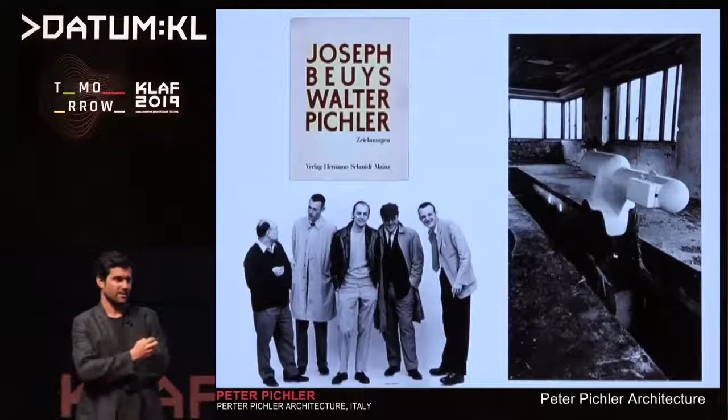He was a cousin of my dad, and Walter was really a true inspiration for me. He was one of the driving forces of the Vienna, Austria architecture scene, where offices like Coop Himmelblau, Wolf Prix, Haus Rucker were all active in the 60s and 70s. Walter was into this movement, and he was having exhibitions with Joseph Beuys and other internationally famous artists. When I met him, he was really encouraging me to study architecture and to see architecture not just as a technical profession, but as something else.

I was lucky to work a little bit on the furniture and to understand what architecture could also be. These are his sculptures that you see on the right, and he creates little houses for his art installations and sculptures. This was kind of an inspiration for me.

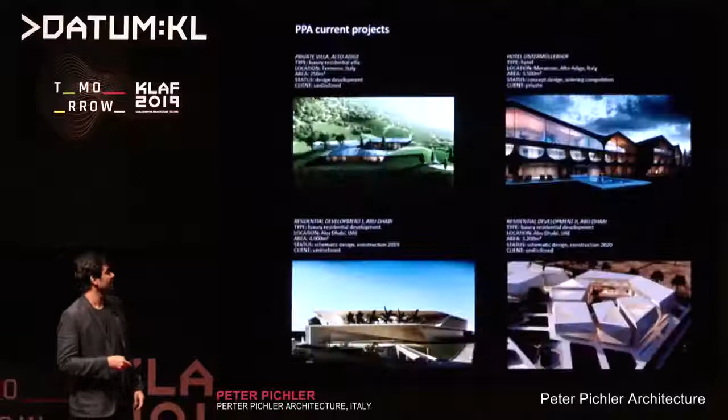Since then, we were lucky to win a couple of national and international competitions. This is basically the work we're doing in the office at the moment. We have some different projects in North Italy, some hotel projects, some work in Abu Dhabi, and we're working at the moment on some residential developments and villas.

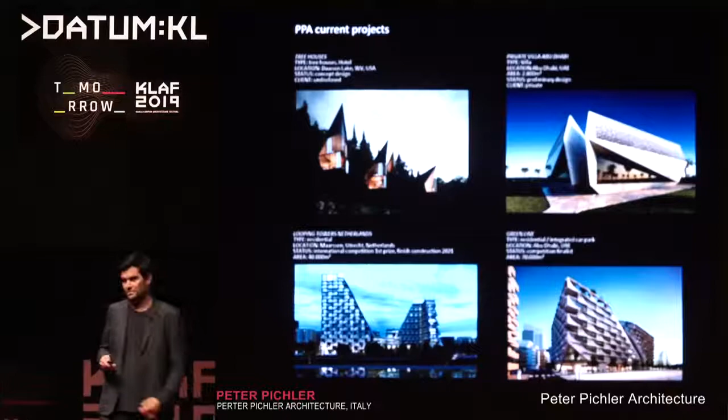We were also lucky to win some prizes in recent years. We were nominated, or were a finalist, for the Dezeen Emerging Architect of the Year. We were nominated as Young Italian Talent, as well as for the Medaglia d'Oro dell'Architettura Italiana.

So today I don't just want to talk about the physical object, but also the parameters influencing this architecture. This is a little bit the credo of our office: that for us, context goes beyond the immediate physical context - architecture is rather influenced by a lot of parameters.

These parameters can be geographical, cultural, political, societal, economical. Of course, sustainability is a big issue these days. Technology and vernacular.

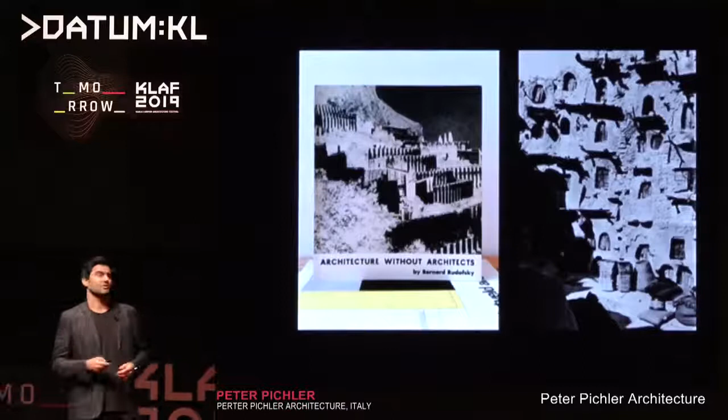One of my heroes, not just because I studied in Vienna, is Adolf Loos. I want to read a quote of his: changes in the traditional way of building are only permitted if they are an improvement. Otherwise, stay with what is traditional, for truth, even if it be hundreds of years old, has a stronger inner bond with us than the lie that walks by our side.

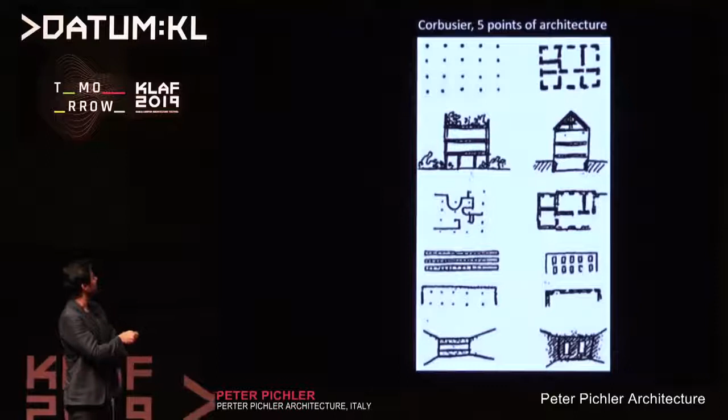When I was a student, I was a big fan of Le Corbusier. Here are his famous 5 points of architecture. What you see on the left side is what you need to do to be more modern or contemporary versus the right side.

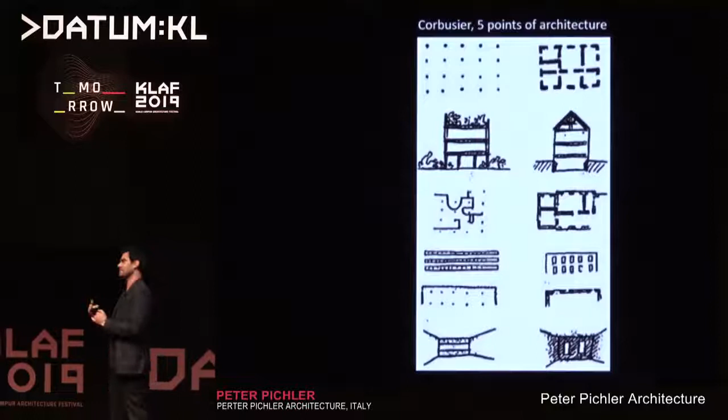If I look at this image, especially number 2 on the right, I'm not really sure if this is still needed or still contemporary. I also think that today we don't talk about that anymore. He was talking a lot about dividing residential, dividing office. I think today we talk about mixed-use development.

Marc-Antoine Laugier was probably the first really theoretical architect, even if he was not really an architect. He came up with the concept of the primitive hut, where he explored the anthropological relationship of man and nature, and that this relationship is the foundation of creating architecture.

So sometimes in our studio we ask ourselves: do we want to go with tradition, or do we want a revolution? I want to answer this question at the end.

I want to start with the first project we did three years ago, a winning competition in North Italy, the Oberholz Mountain Hut. This is my hometown—here is Milan, where our office in Italy is. The competition site was 20 minutes from my hometown, a ski and hiking resort, very beautiful, in Obereggen.

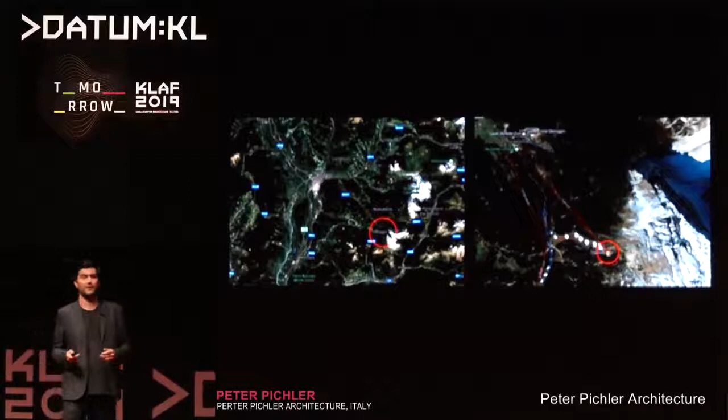The client was asking in the brief for a mountain hut with a restaurant. We're here at 2,000 meters. This is the famous mountain in the region, the Latemar—it's part of the UNESCO World Heritage, all the mountains, the Dolomites where I come from.

Down there was our site. You see the very beautiful mountains, landscape, the woods. When we visited the site, we immediately recognized this hut—a very typical building with a sloped roof, a wood construction, because the wood is right next to it, so it makes a lot of sense to use wood.

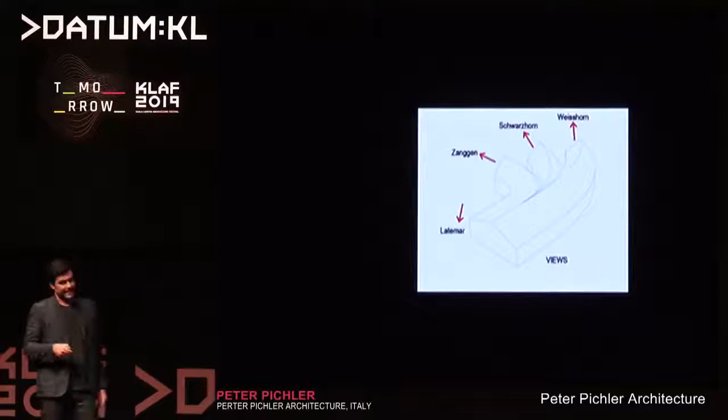I think most, actually all, of our winning competition concepts are very simple. In that case, the idea was to create a kind of fallen tree, looking towards the main three mountains of the area, as a contemporary interpretation of the typical mountain hut. So we came up with this idea.

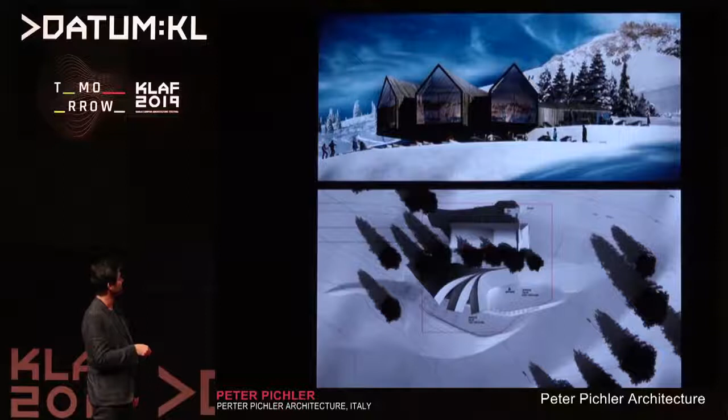This was the competition entry—you see these three sloped roofs facing the main mountains, and the wood construction. Here on top is the existing cable structure, and this is our new structure. You come down here to the ski slope, here you have a terrace, and from here you can also go hiking to the Latemar, the mountain we see on top. So this was our competition entry.

Here you see you arrive with the elevator, you can go down. This is already the construction.

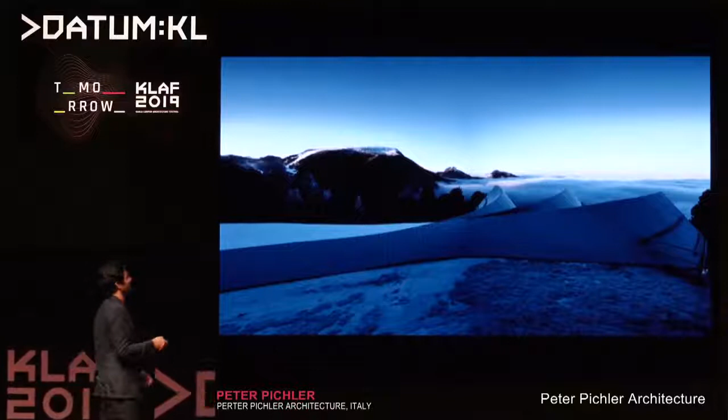So we had a lot of debate here. You see the main three mountains that I was mentioning before. But the client, there was not a single client, there were 8 people in this company. So there was a lot of debate because there is another mountain here in the background, the Mendel, that you don't see because it's foggy. So we were rotating the hut around probably 15 times till the client called us at 7 in the morning and said, that's the position and that's how we're going to build it.

So you see this almost fallen tree, this connection with nature of this building. And here you see it in the winter when people are skiing here. And again, you see this very typical sloped roof from the outside. It looks like a very typical structure from there.

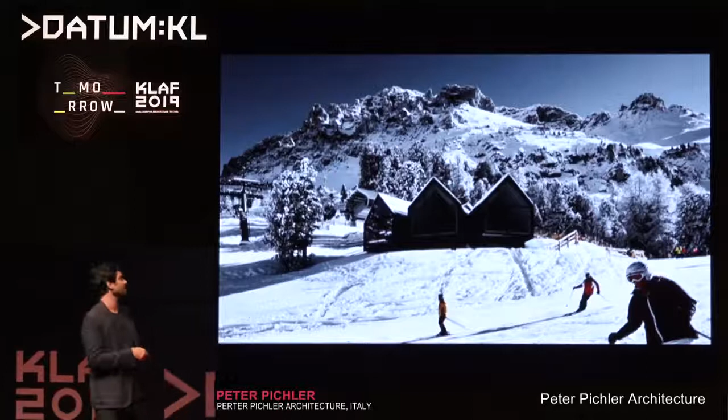But then when it comes to the inside, this is what we call the contemporary interpretation of it. So you see these spaces here. In the region where I come from, there is a space called Stube, which is a very typical space, always made of wood. It's a very small, cozy space. Sometimes you have a chimney inside. So what we tried to do with this project is give a kind of contemporary interpretation of this Stube, this very typical space.

So we created this kind of open space Stube with a structure that gradually fades from a roof into these walls, to create a certain privacy in these pockets that are looking outside and facing towards nature. So you see here the restaurant.

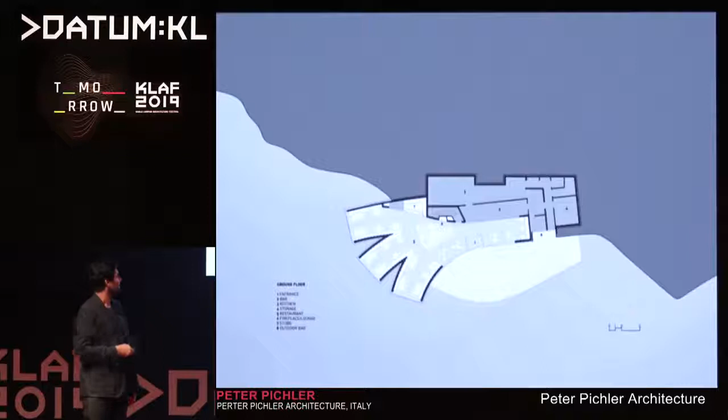The plan is very important, not just a graphical image for us, but it really explains the concept. In this case, you see the light gray here, which is the actual restaurant with the bar. So the public spaces versus behind we have the more private spaces, kitchen and storage. And at the same time, this concrete wall that you were seeing before on the right side, you see it here in plan, and it's dividing the public space from the private one, but at the same time it defines exactly the line where the building is above ground and underneath ground.

You see a section here. You see also the existing station. And at the beginning we had a discussion with the clients. We were winning the competition and he was asking us, did you already build on 2,000 meters? We said no. But do you have experience? We said no. Can you do that? I said, let's try it. And he trusted us and said, okay, let's do it.

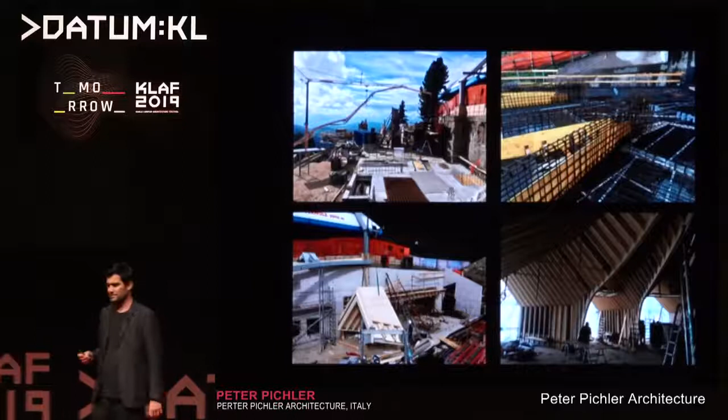Here you see construction images. Of course it's pretty challenging to build at 2,000 meters, because we were also thinking about using a helicopter at the beginning, but then there was not really a need for it. There was no walking path to that hut, so we created a small street up there that could be used during construction, and now we reduced it, and it's the walking path where people can hike up to the hut. So here you see these elements of wood that slowly, step by step, were brought together in the structure.

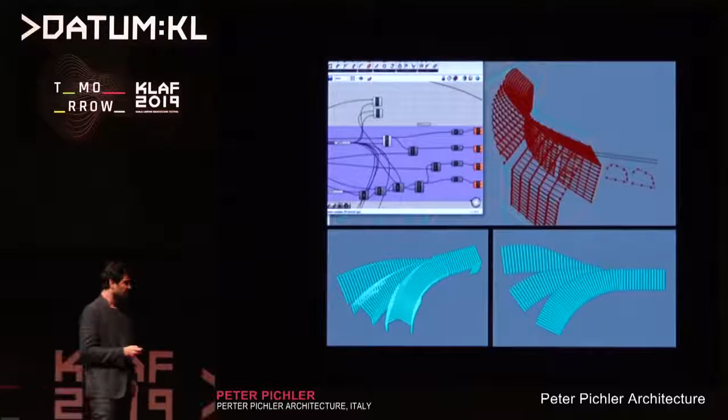You see a parametric model, how we developed this entire structure. We also believe that intelligent architecture needs to involve engineers since the beginning, not just after the competition, and not just structural engineers, but also sustainability is a very important issue. So we developed this kind of structure, and again, coming from the background of Zaha Hadid, where I saw a lot of things like form finding, I was not so interested in that. We really use parametric tools in order to optimize structure, but less to generate form.

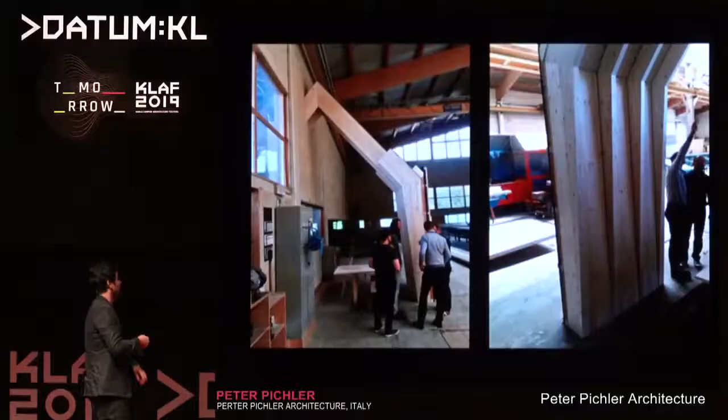So this is a prototype where you see this rib structure gradually fading into zero. This is a detail that we really like, because for us this is like optimizing the structure, and structure for us is something beautiful, something we don't want to hide. It's something we want to show also in this project. So you see here the only steel beam that is basically used in this project.

Insulation when they finish the project, and here is the final result. Also in this case, black wood, or blackened wood, has a certain tradition there. The natural huts in the area with rain and sun, after a while become gray because wood works that way. So we didn't want to have this natural pattern of the sun, because our building was exposed south and north. So we used a technique. At the beginning we wanted to burn the wood, which is also a very old tradition, but it was unfortunately too expensive, so we found another solution for it.

Here is the terrace, you see the entrance. There is this kind of glass that divides the inside and outside. Here you see the lounge space, and again this wall that divides the spaces. The furniture is another issue.

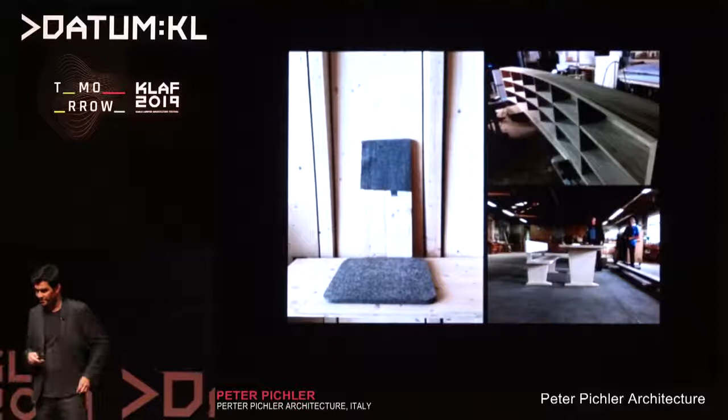We did a kind of slightly reinvention of the Tyrolean classical chair, which you see here. He was very happy to work with us on that project, and we modified and designed the furniture ourselves. Here you see some outdoor furniture, indoor furniture.

Also, this was a funny adventure, bringing the 500 kilo heavy concrete sink up to 2,000 meters. When we installed it there was a little problem, but the client didn't see it, so we were quite lucky.

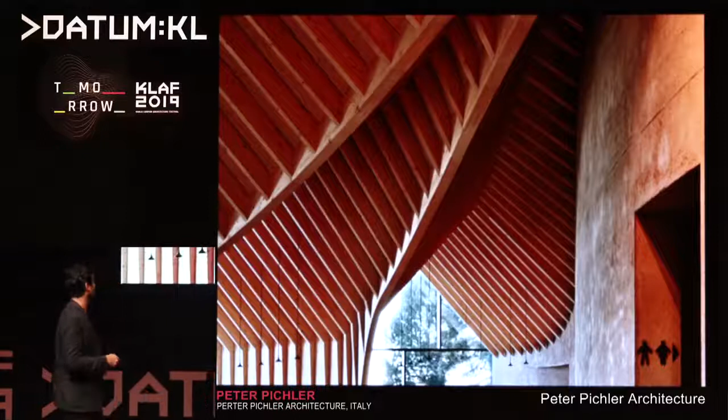The details of the connection of these ribs into the concrete wall, and the bar when you come in. This is the bar view. And again, nature in this case is the most important, or the project should connect to nature. I think this image speaks by itself.

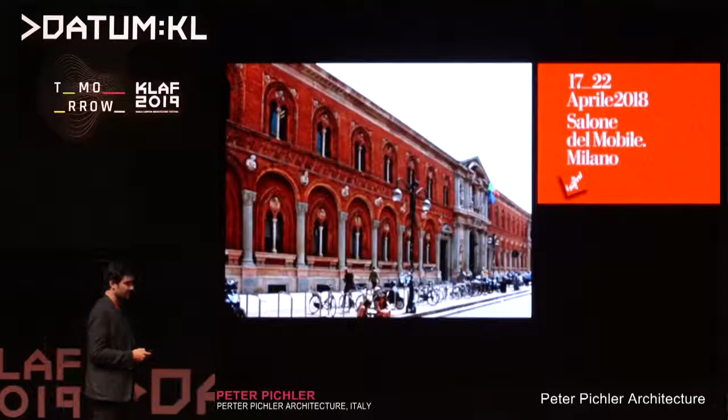Another project we have done in Milan for the Salone del Mobile last year. I think maybe a lot of people have been there already, but if you haven't, you should go. It's definitely fun, a lot of party, especially for the young ones here. It's a lot of fun for 2 weeks.

Here you see some images of the Fuori Salone. So you have always the main Salone, which is in the fair, and then you have the Fuori Salone, which are mostly installations and parties in the city within the center of Milan.

We were asked by Gilda Bojardi from Interni to create an installation in this beautiful courtyard of the Ca' Granda. This is in the center of Milan, in the Città Studi, so it's a university. It's basically the first Renaissance building in Milan, done by a famous architect, Filarete.

Our installation was basically playing with the main elements of the Renaissance, which are geometry, symmetry, and proportion. We tried to create a kind of wood structure made of 1,600 sticks, made of 3 wings, that could give a contemporary interpretation or answer to these main 3 features of the Renaissance.

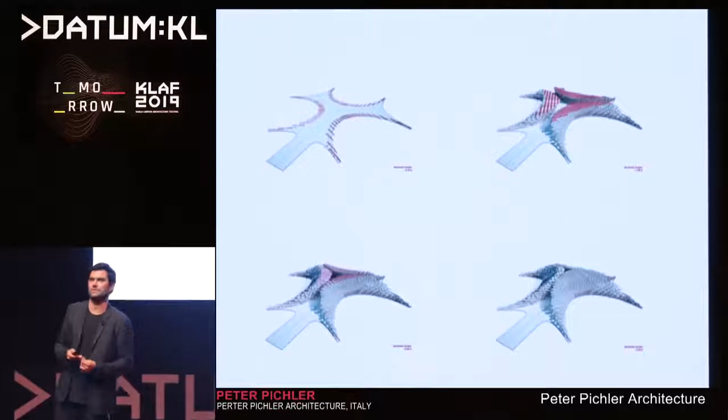So we came up with this idea, with these layers, to create these 3 wings where you can go in and just relax. We also created benches inside where you can sit down. It was actually a lot of work, but in the end it was done very quickly. I was wondering how they could bring up everything in just 2 days.

Here you see, when you enter the courtyard, the installation finished. For us, the symmetry was very important, so it was important that our structure really lies down at the entrance and opens up.

You see this kind of physical object from the outside, but for us the space inside was very important. Like in all our projects, I think the space inside and the perception of that space is very important. In this case, it's really about light and shadow.

Here you see the different layers of architecture. You have the kind of brutalism, a very iconic building in Milan that everybody who has been there knows, Torre Velasca, brutalism from the 50s. And you have the Renaissance, and then you have our small wood structure there.

You can go into this space, and this image really explains a little bit the concept of light and shadow in the structure. People walk a lot during the Salone del Mobile, so they're pretty exhausted. The idea was that you see these benches on the side, so you can go in and enjoy the space, relax a little, and experience this perception of light and shadow inside the structure.

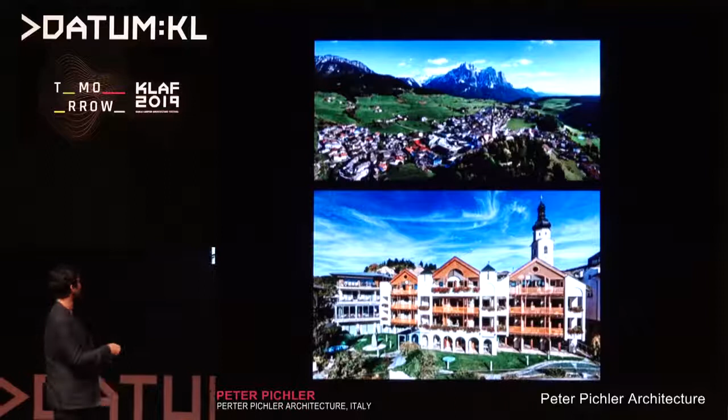The client asked us to participate in the competition, and I asked him why he wanted to invite us. He said he didn't really know, he'd just heard of us and thought we might be interested. He came with the idea of a flat roof, putting a pool and another sauna on top because he needed more space. We said no, we wouldn't do that, and he wouldn't receive anything from us if we took that approach, but if he wanted, we'd participate.

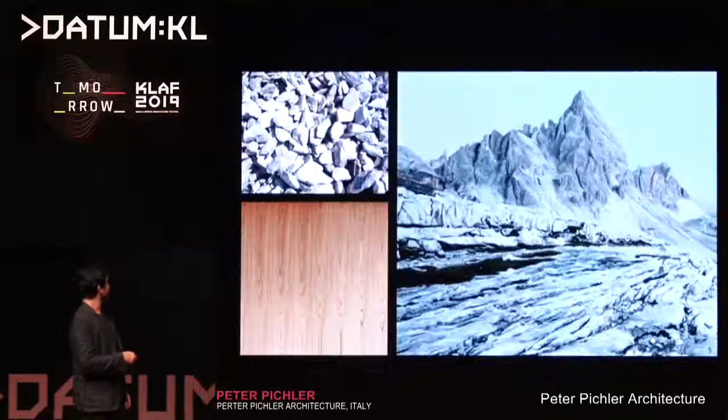We came up with a very simple concept: to bring nature and the mountains back to the hotel, working with local materials and local wood. Later we had the idea to collaborate with the client's son, who is an artist, and have him create beautiful art photography of the mountains for the hotel. This was our competition entry.

The idea was to open up the spaces, to remove all this kitsch. We left just a few slabs and a few columns, and the rest was totally restructured.

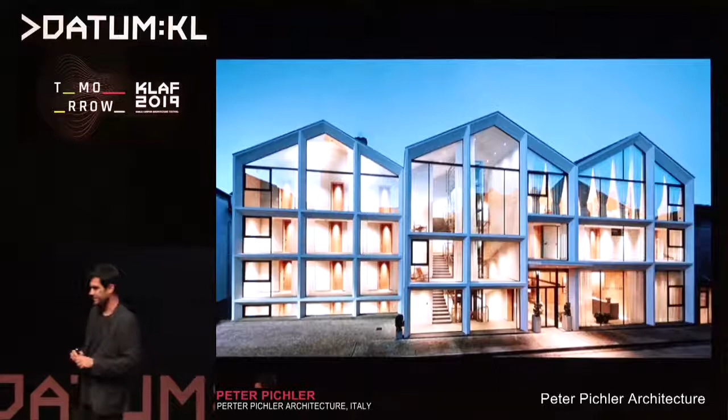As you can see here, this is the built project now. This is the entrance when you come from the street side. The building should open not just towards the mountains on the other side, but also towards the main street, and towards the church, which you'll see in the next image.

These are the rooms — you see in the background the center, the small church, and again this opening of the entire structure towards the mountains. From the inside, we tried to create a contemporary interpretation of alpine style that's really reduced in aesthetics, with open, connected spaces.

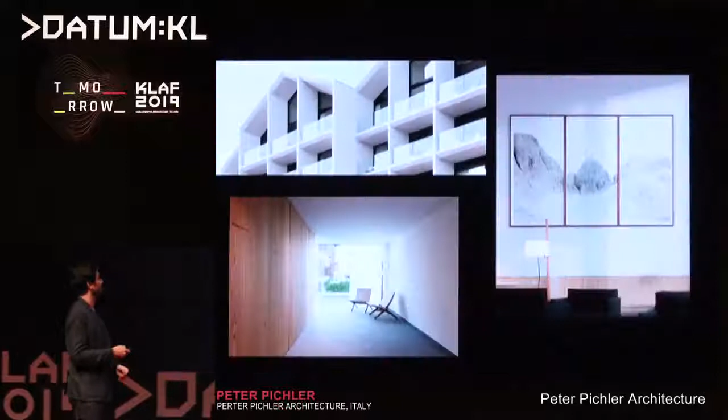This is the artwork I mentioned, made by the son, Marcin, who spent about two weeks in the area photographing the mountains of the region. We installed these beautiful works in the public spaces as well as in the rooms — here you see some of the public spaces, the rooms, and the restaurant.

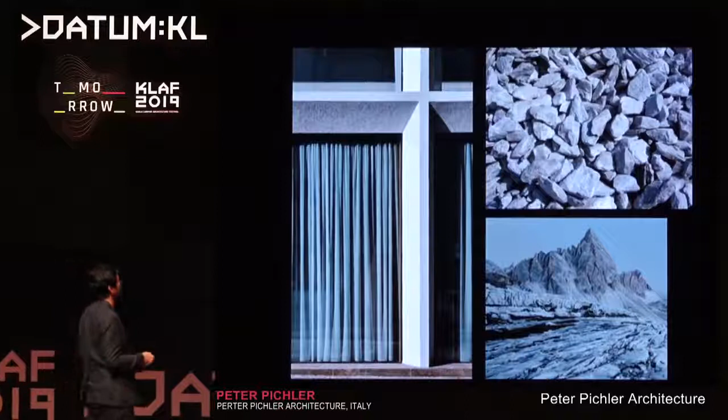For the facade, this is a render — we used an exoskeleton facade, and we incorporated chalk that comes from the Dolomites, since the stone of the Dolomites is made of chalk. We used this chalk in the render of the building's facade.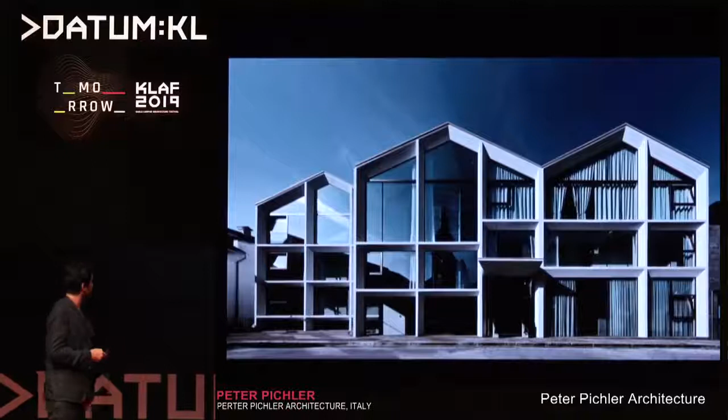Here you see the simple principle of the facade reacting to the program and orientation. The north facade, where the public spaces are, has a flatter exoskeleton structure, while it opens up towards the south, creating loggia spaces that provide natural sun shading.

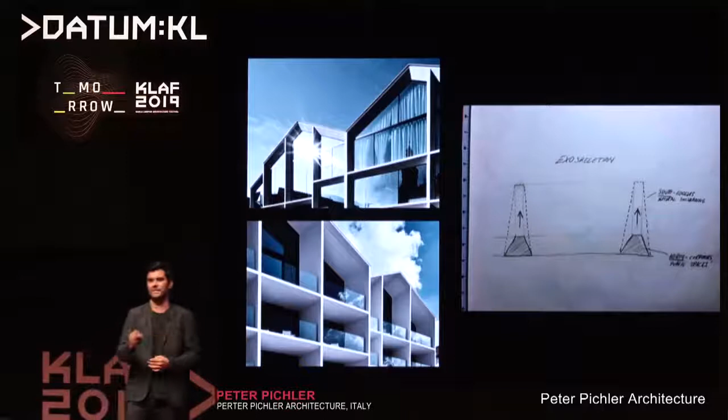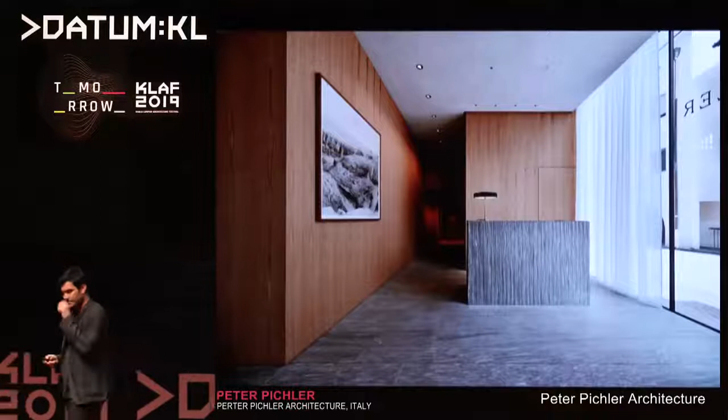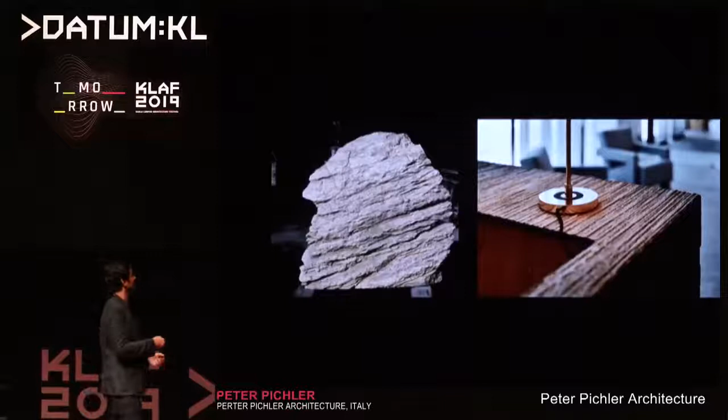Some other interior spaces — the rooms, the top floor where we used the height of the roof, and the entrance. Material is very important to us here too, to create a relationship to context. We used stone and water-cut it to achieve a rough effect like rocks, bringing that rocky texture back into the hotel. Here are some public spaces, the bar, and some details.

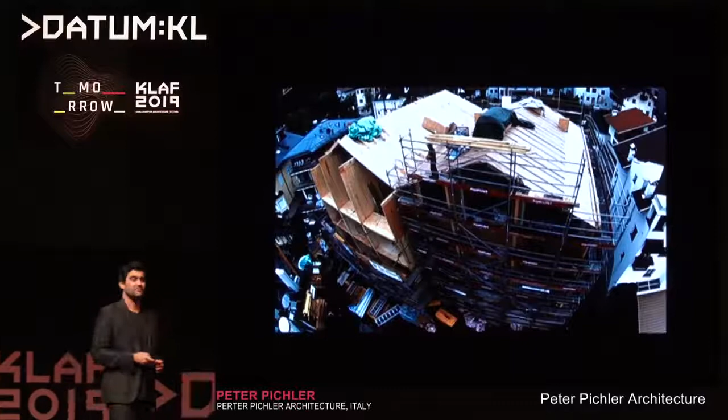In this case also we tried to almost chop off a floor with an effect that we just tilted back here, the garden floor. You see the construction here too - we had about 3.5 months of construction, which is pretty tight. I think in Italy it's only possible in the north because all the companies are used to working so fast.

And they have very high quality in how they work. So you see here some images. We have this kind of exoskeleton as well, like with the balconies in a wood structure, and then all covered with our rendered facade. You see here the context - for us again we tried to go with sloped roofs, as you can see, matching the context, and not the flat roof that our clients were suggesting. But at the same time, I think this building has a certain character within this small village. So that was the idea.

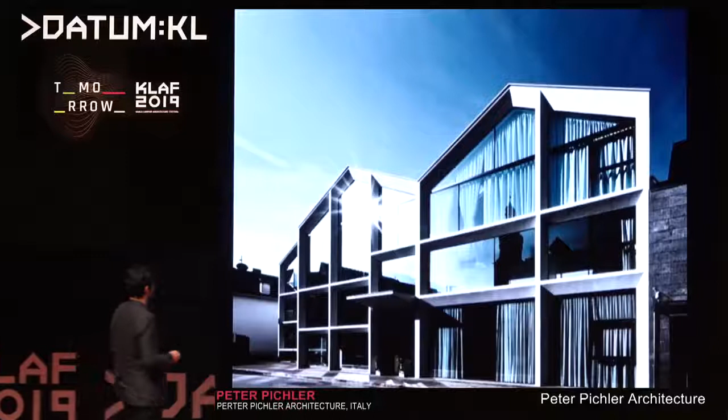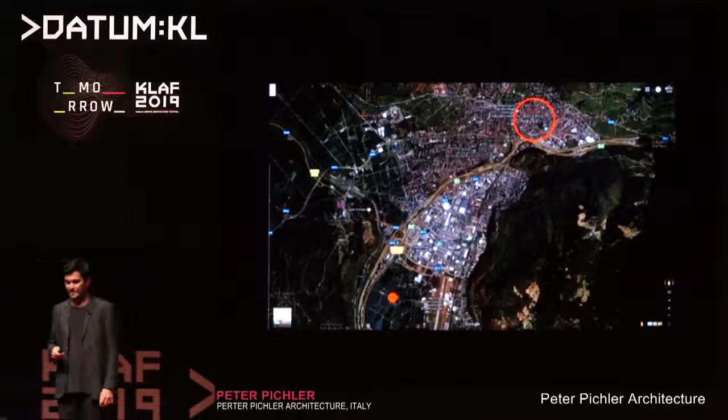Another project - this was our first project that we actually did in the office, and it was published in a lot of magazines. It's also situated next to Bolzano, outside, sitting within apple trees. In this case, the client - you see the house here on top, this is the existing house of the client, and this is the garden of the client down there where you see the pool. He had this little piece of land in front where we could build, and they wanted small structures that they can rent, like 40 square meters.

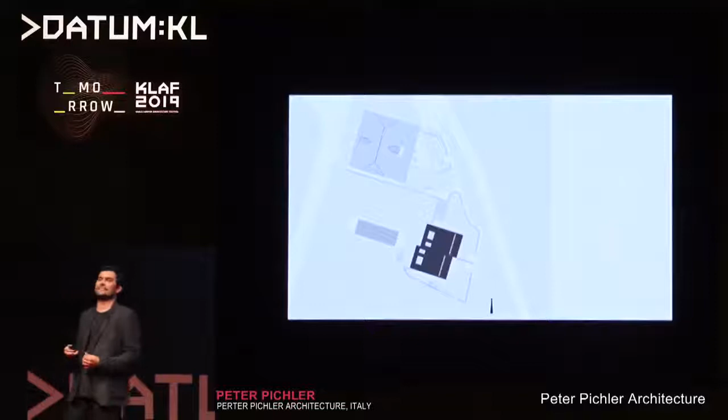But at the same time, the client was asking us that they didn't want to see these buildings because they are in their garden. So we came up with an idea to basically have almost like an artwork in their garden, with this mirrored glass facade that reflects the nature, and this duality of the facade on the other side where you enter the building.

So here it opens up - the clients, or basically the guests, come in from this side, this is east, so the entire building opens up. It's very, very small, and you see here a little bit of the context, the apple trees. You can rent these small units.

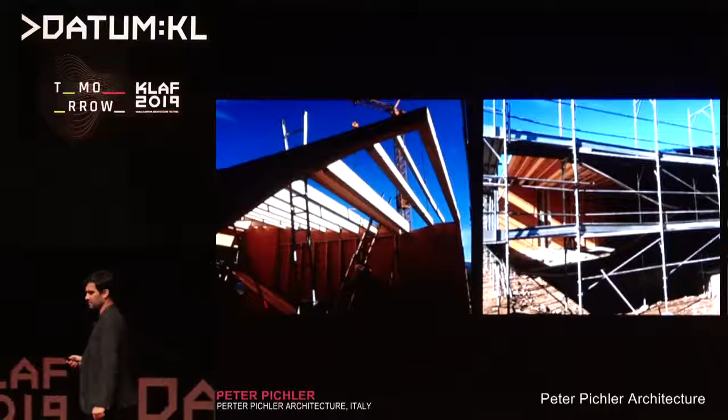Also in this case, a wood structure. We have a very high standard in North Italy in terms of sustainability, called KlimaHaus, which is similar to LEED. Of course LEED is international, but this is a very high standard, so building with wood makes a lot of sense. You can do a lot of interesting things, and in terms of sustainability, I think it's a great product that has a material with a big future.

Here you see the installation of these very heavy glass panels on one side, and this gradually fading structure without the column. We were debating a lot with the structural engineers about this, but in the end we made it work. This fading facade opens up into the space, then you have a sliding door here so you can close the space, and you have this very tiny kitchen.

A detail of it - and as I mentioned before, you can rent these small units on booking.com or wherever you want. The interesting part is that after a couple of weeks or months after we finished the structure, the client was calling us showing passports of people coming from everywhere in the world. The project was published very widely.

And I think in this case, for us, it's also a new way to define tourism, because it's not like a hotel, you don't really have a service there. You have a very small kitchen, but you need to basically do your own grocery shopping. You come there, you can go skiing, you can go biking, but it's not really a hotel. I think with architecture you can do a lot of things, and this is proof that new thinking helps.

Another project that we just started a couple of months ago - this is in the US. We went to West Virginia recently, and there's a client who has a very beautiful lake, and he wanted to do, or we came up with an idea of, tree houses. In this case too, we thought it's a new approach - not just to create units where you can spend time in nature, but at the same time it should be a cutting-edge project in terms of sustainability.

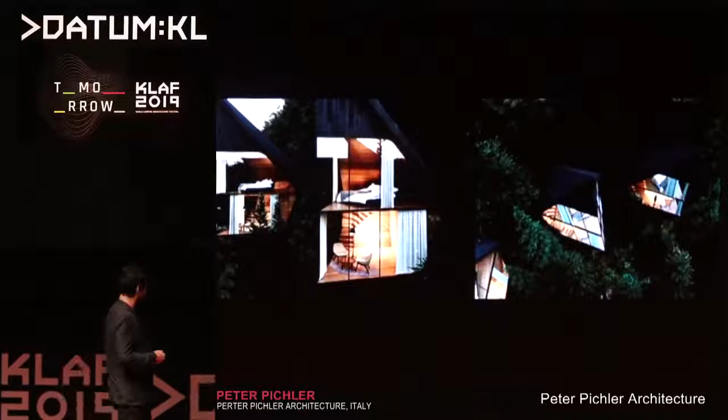These are just a couple of images of these units.

Another project currently under construction is a private villa where I come from. There's very good wine, and this winery is a very famous winery from the place. You see here the hill, their main hill with wine, and we were lucky enough to win a competition on top of this small hill. This is the city of Termeno—they've won a lot of prizes for wine, apparently one of the best now in Italy.

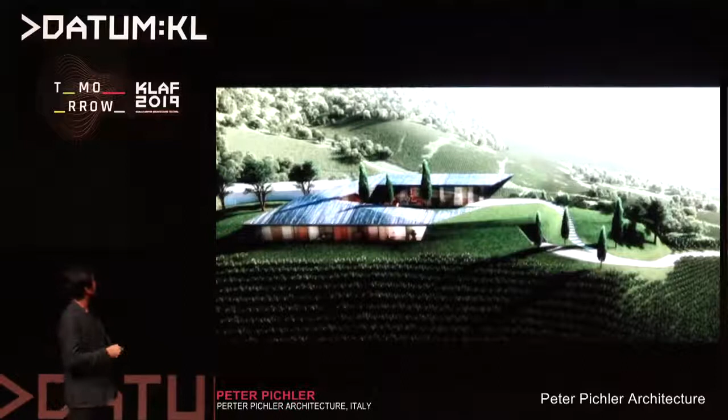This was our project, coming up again with an idea of landscape to create a kind of house or villa that really grows out of the hill. In this case, it's very windy up there. So our concept was to create a courtyard, because otherwise in June, July and August you can almost not stay there because it's so windy—wind that comes up from Lago di Garda, a lake.

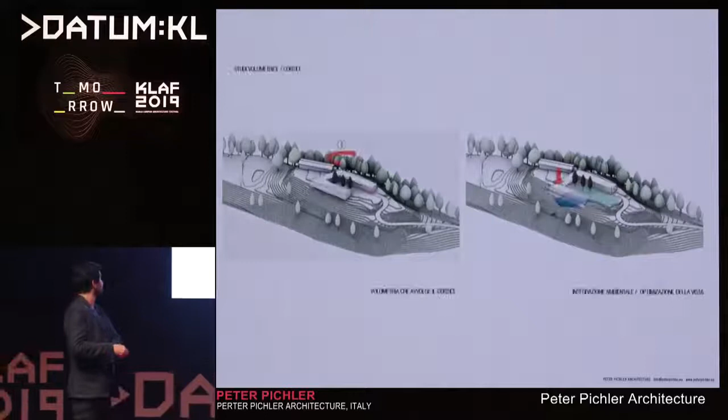So we came up with a very simple concept here. These are existing, not listed buildings—just ugly, small buildings that were used by the guys collecting the grapes, and they wanted to tear them down. We also have 3 existing trees that we wanted to build around, creating this kind of sloped structure that grows out of the hill.

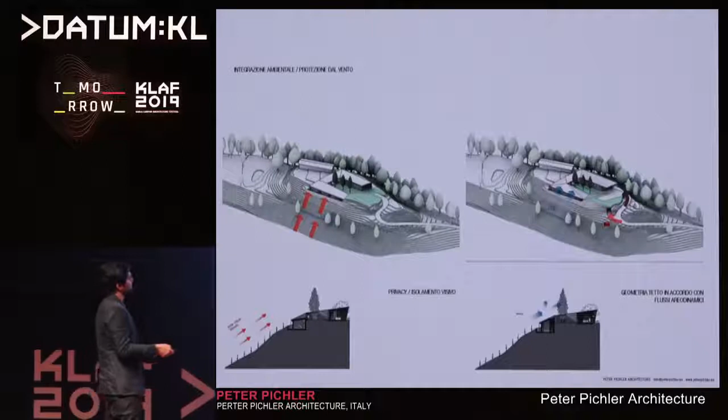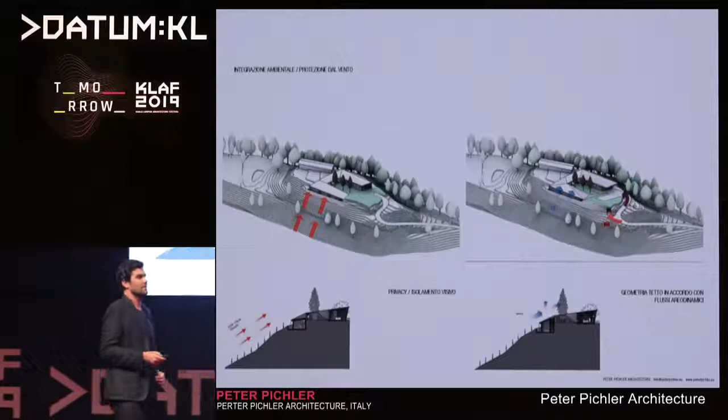You can see here in the section, on the right, the problem with the wind. So you have this kind of courtyard that really saves you from the wind, and at the same time, from the center of the village you cannot really see what's happening up there. That was also a request from the client.

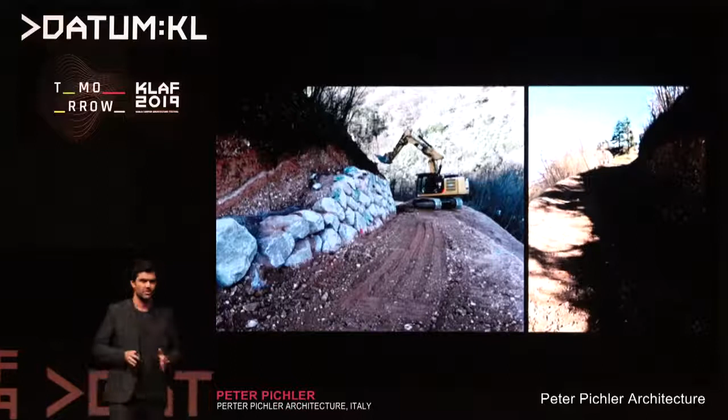So you see here the structures. The existing one is basically just the garage and some storages that we'll start to tear down in the next 2 weeks. This is our project here, and you see the facade. Construction already started. We needed to create a new street that brings you up to that hill, because the existing one we didn't want to touch—it was preserved and we didn't want to destroy it when all the machinery goes on site. So we created one from the back.

Also in this case, the material is local—called porphyry, a local stone from the area. The idea was to give an answer to wine in this case as well, so it has a little bit of red color, being a stone from the area. We'll try to build the entire villa as a rock almost that sits on that hill. You see here some interior ideas, and again, the project itself.

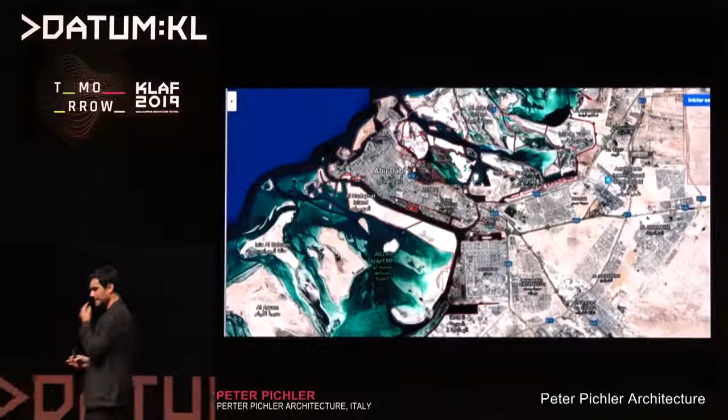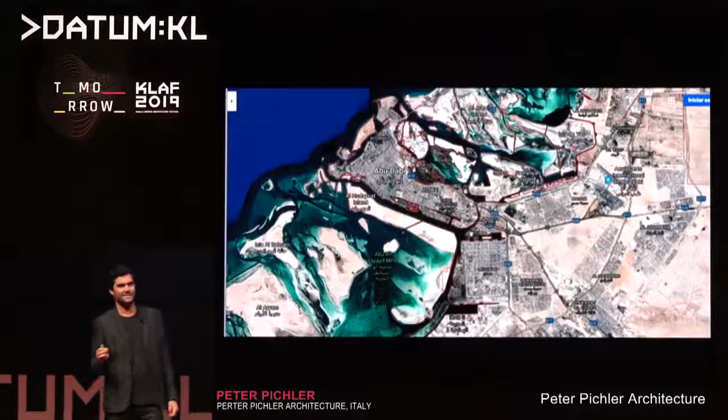As I mentioned before, we were lucky enough to work also outside Italy. This is a project in Abu Dhabi, which is crazy at the moment to work there. We needed like 3 years, and we are still waiting for the building permit, so it's crazy. It's not funny, because you need to submit not just your preliminary or concept design for the municipalities, but the entire schematic design, all details, all structure, MEP—and then they come up and say, no, here you need 3 meters instead of 2. So you go back, work again with all the consultants for half a year or a year, but now we're pretty close.

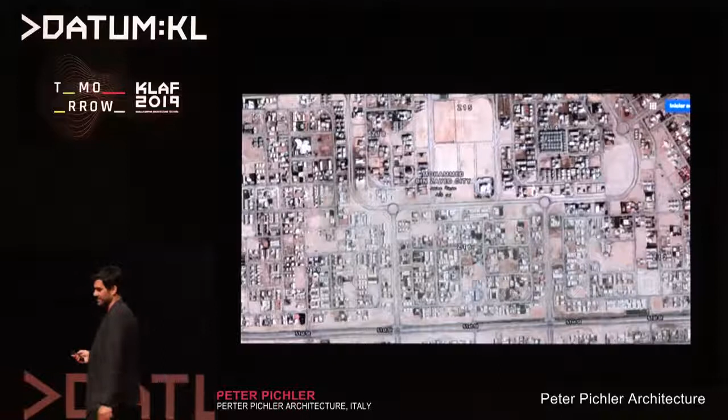This project actually came from an email that we thought was spam. We didn't even have the office at that time. I was still in Hamburg working for Zaha Hadid, came back, met Silvana, and we received an email—we didn't even have a proper website then. There was this guy writing us on a Gmail address, asking if we wanted to do a house for him and his sons in Abu Dhabi. Silvana thought it was a spam email, I said okay, let's write him back. Two weeks later we were in Abu Dhabi for a week doing research, and I think now it's happening.

This is our project. In this case, of course, it looks completely different, which is good compared to the other projects that we're doing.

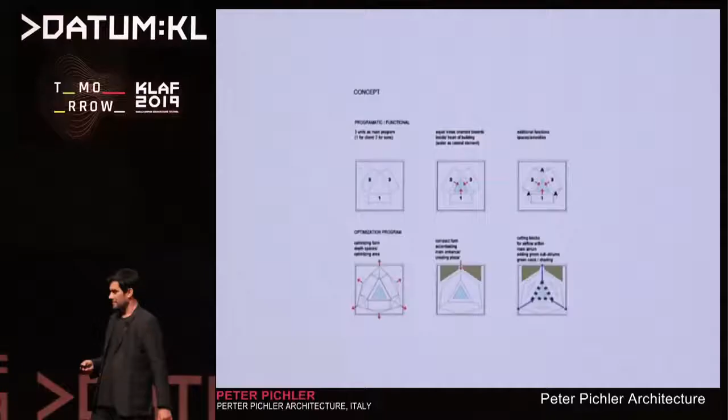The first thing that we analyzed when we were there is privacy. And privacy, the culture is completely different. So it's not mostly about the exterior spaces, because if you look outside, it's just desert and you don't see anything.

But we came up with an idea that everything faces towards the inside. We came up with this 3 villa project, made of basically 3 villas for the client and his 2 sons. Everything is facing towards this internal courtyard with a water element, that is also a very important feature in Arabic culture. And the outside of the facade is pretty much closed.

So we have this mashrabiya, which is a very typical element in Arabic culture as well, that is filtering light through the structure. And we see it here also in this case.

For us, it's very important to work with engineers and other consultants since the beginning of the project to develop something intelligent together and not just go alone as an architect and think that you do something great, but it's not. I think we really need to collaborate together these days in order to create something meaningful.

In this case, if you've ever been to Abu Dhabi in August, you will see that it's not so funny. You come out of the airport and you think that you're in a sauna with 50 degrees. So of course that's one problem, the heat and the sun.

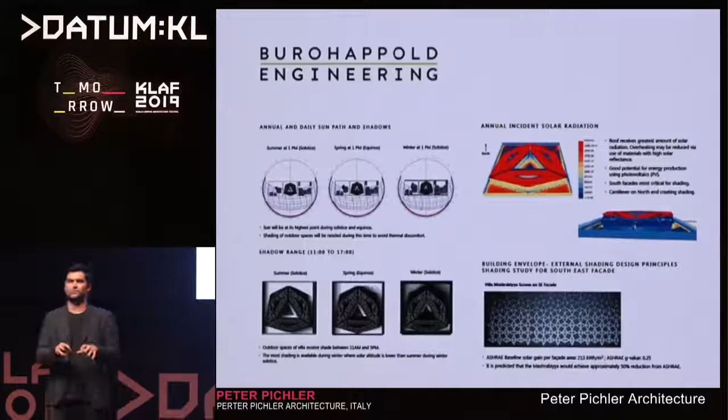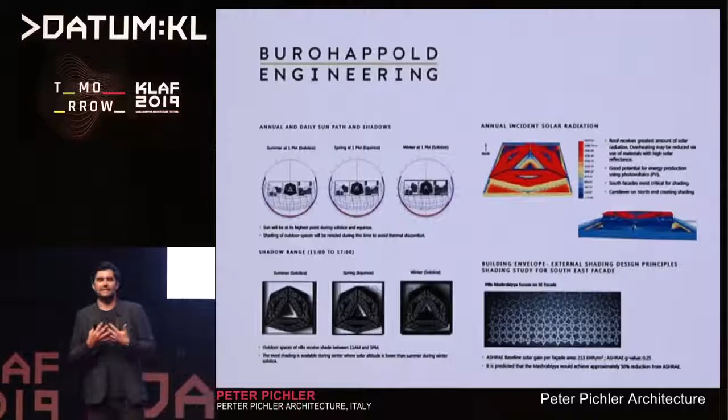So we try to come up with a structure that can create intelligent sun shading, and at the same time we try to create a kind of contemporary interpretation of this mashrabiya, the very typical traditional element that we see down on the right.

So in a parametric model we try to filter light, so the mashrabiya also reacts to the orientation, north versus south, east or west. It's more closing or opening.

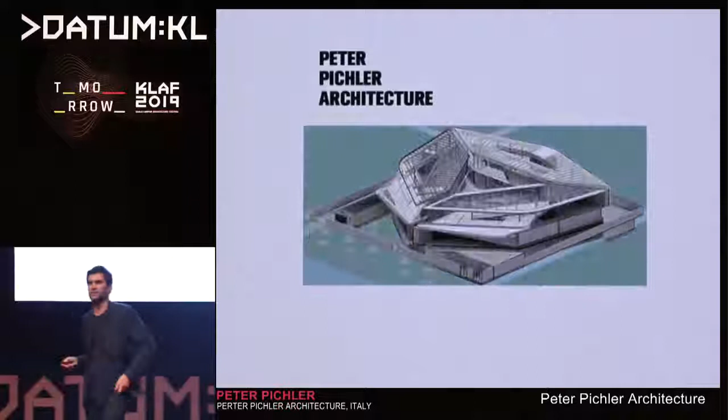This is a BIM model. Also in this case, we were not so lucky with the local architect because he never replies to our emails, but I think somehow it needs to work.

I don't know. Like most of the projects you start, you never know where you end. You just start working and you don't really know what's happening. But that's also the funny part, I think, of our work.

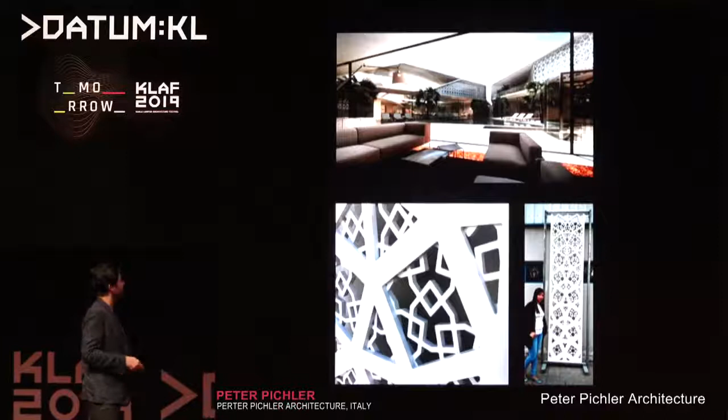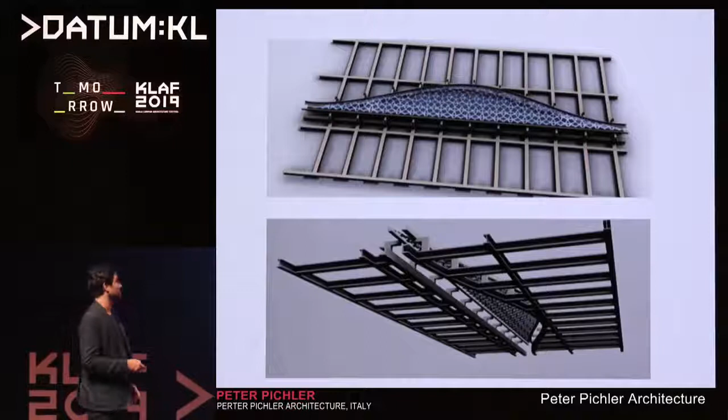This is a mock-up that we worked on with a local company for these elements. And we have, on the inside of the villa, a kind of skylight that we also try to filter the light with this mashrabiya structure.

Another project in Holland, we won a competition for a residential development next to Maarssen. I think nobody knows where Maarssen is. Everybody knows maybe where Amsterdam or Utrecht is. Maarssen is outside the city.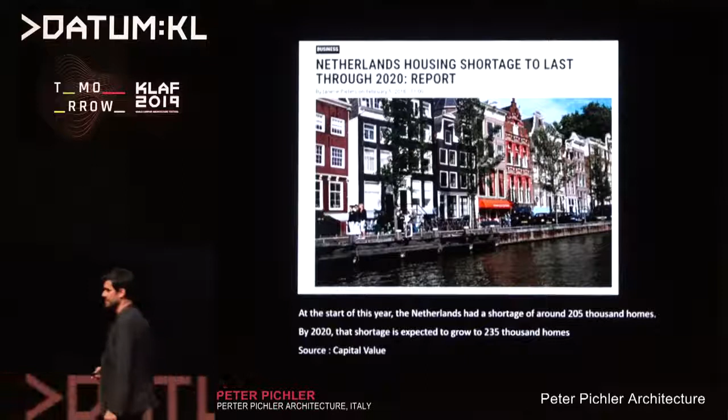There's an interesting fact that when we came there the first time, we talked to the local engineers, and they were telling us that it's really a fact that older people who live in the countryside sell their houses and move to the city, in order to be closer to their kids living in the big cities. And this, of course, creates problems.

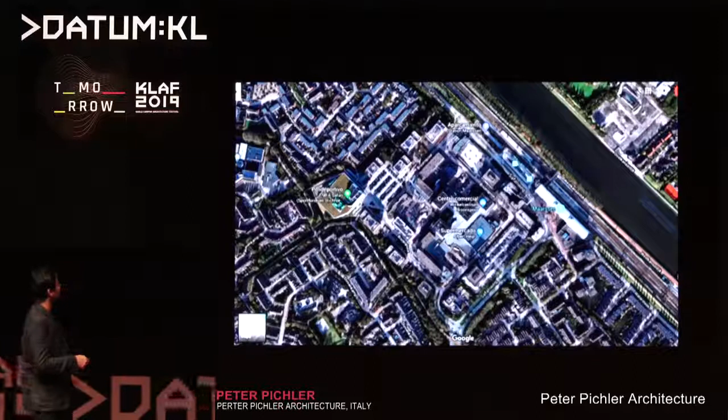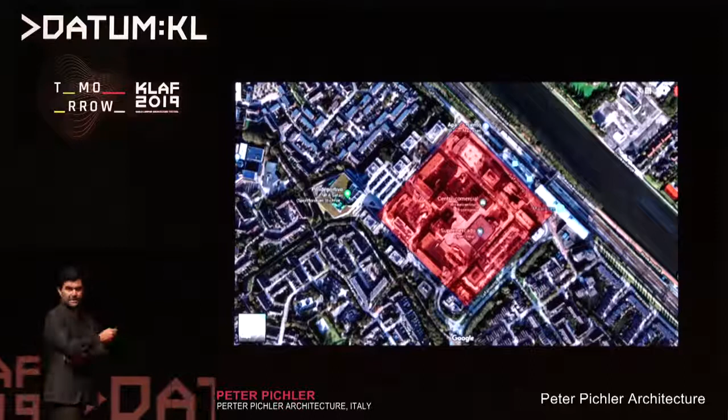And we were invited to this competition in Maarssen by an Italian-Dutch developer. You can see here the site, the red site. He owns basically some existing offices that were there from the 60s already, and a small supermarket. And here you see the train station.

So this is the direct connection from Amsterdam, Utrecht. And we are situated here next to the canal. This is the situation where you see on the left side of the canal this very beautiful, let's say, ancient Dutch style with bricks and sloped roofs. But we are actually on the other side.

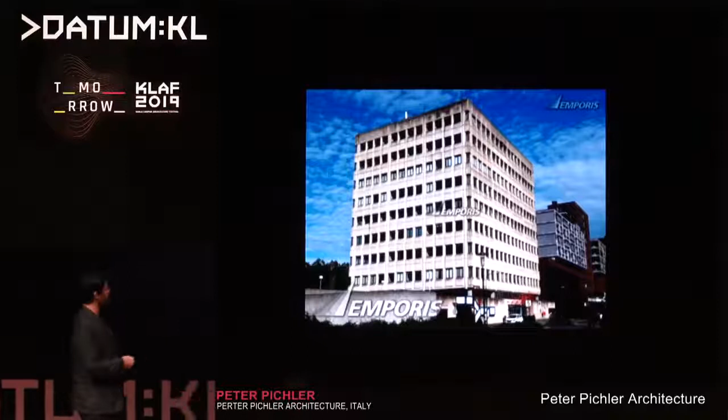We are here where there is basically nothing. And the idea of the developer was to create a project that can really activate this entire area. He believed that with a competition and choosing the right project, this would work. So this is what you see here: the existing block that will be torn down. And this was our competition entry.

I think for us it's not interesting to build in prime locations like we've seen before in Alto Adige. Of course it's very interesting to work there, but I think it's also important to work in areas that are not activated and are down at the moment.

There's an example in Milan at the moment, in the south of Milan, where they created the Fondazione Prada. There was nothing there before. Now it's a very beautiful museum by OMA with a cafeteria and stuff, and the whole area really started to be activated again.

So this was our concept, the looping towers. A lot of residential space is currently required in the Netherlands. We were invited to a competition for a residential complex in Maarssen.

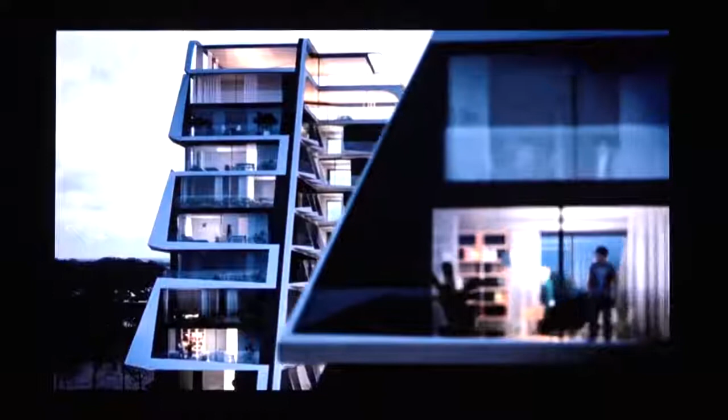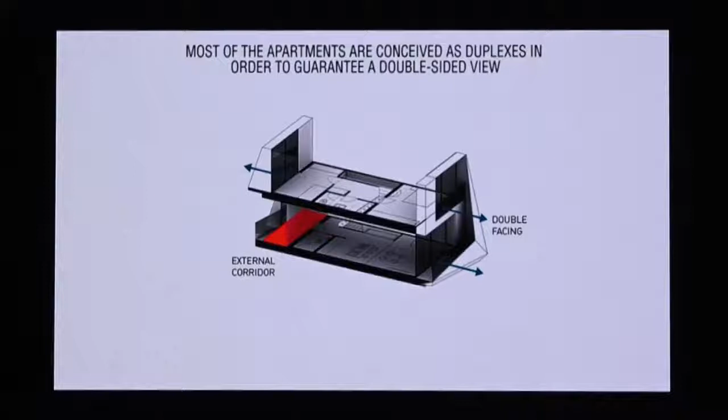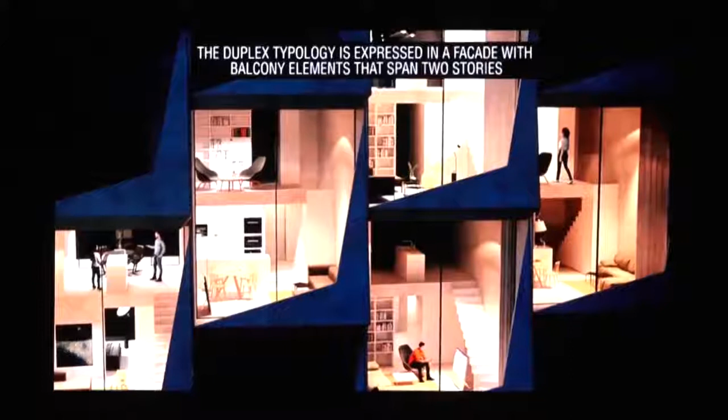So also in this case, we try to create an intelligent structure, working on the vernacular identity of a duplex, because we are in Holland, and I think this works in Holland. In Holland you have a lot of stairs, very steep stairs, and in this case the units are small, like 50, 60 square meters.

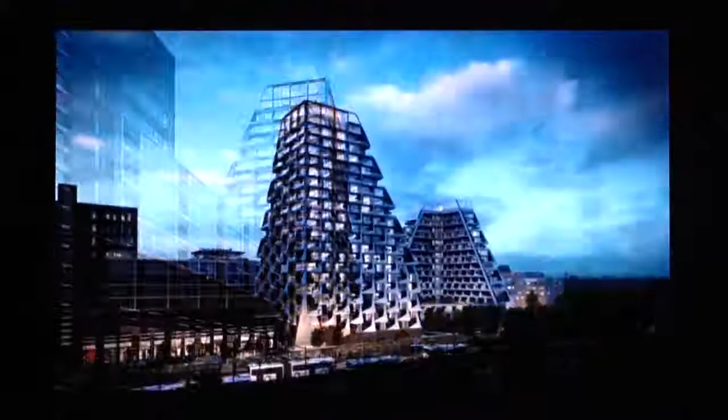We wanted to create a kind of loop of these tilted towers, also for not overshadowing the neighbor buildings, and to connect this loop with the public spaces and the running track. So here you see the train connection from Amsterdam.

Also in this case, it should be a project for younger generations, to give them a different opportunity where you can say, okay, if you work in Amsterdam or Utrecht, you're there in like Utrecht 10 minutes by train, Amsterdam maybe half an hour. But you can live for much less here.

You have a train in front, you don't need a car. It should be mostly electric cars in the garage, even if the municipalities are not there yet. That's, I think, another problem of today, that a lot of rules were made like 50 years ago that are just not valid anymore.

I think that's also a main problem if you look at Italy, that there are a lot of rules, and you go to the municipality to talk with them and they show you, yeah, it's written here. But you say, come on, we are almost in 2020, and we're talking about rules that were made 50, 60 years ago. I think there needs to be a radical change as well with that.

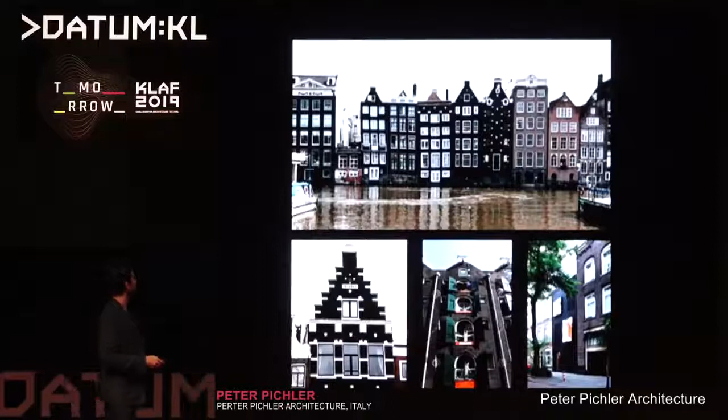These are some examples of Dutch brick facades that we analyzed, which could then be used for our facade as well.

China, I'm happy to be here again. We won a competition - this was actually our first project in Asia. We don't know if it goes ahead. In this case, the project is in Kunming, southern China.

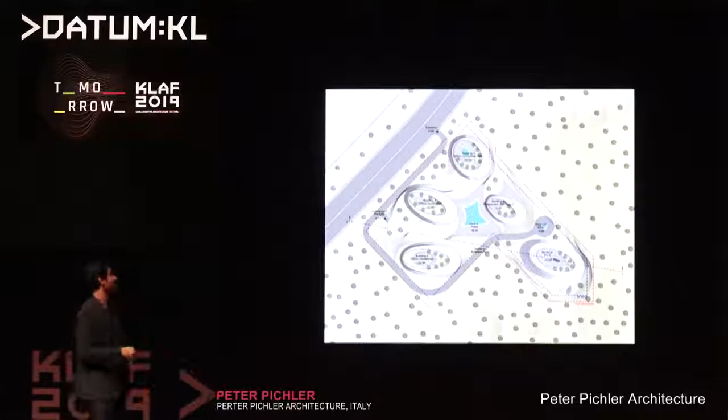It's very difficult to talk to the client because he doesn't speak English. So every time we do a video conference, I say like 3 words, but then there's a translation that goes for 20 minutes and I don't know what he's talking about. In this case, it's a mixed-use development of residential, office, and parking spaces.

We're here in Kunming, close to Vietnam. What you see here is the site - it's actually like a small hill with a small forest on it. And this is the Kunming stone forest, which I think is very beautiful in the area.

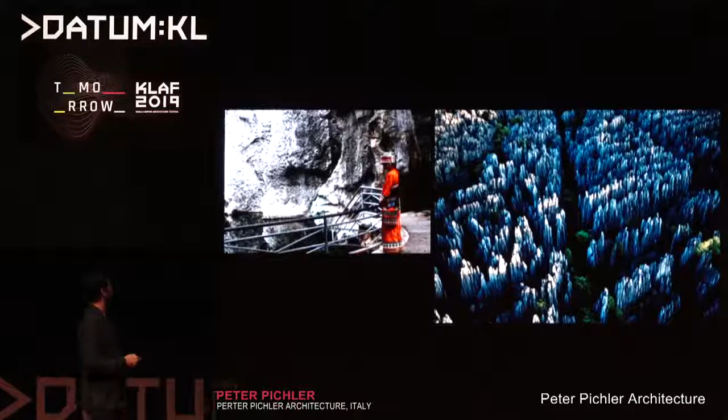We came up with an idea to use wood, because I think wood has a very strong bond with Chinese culture. In this case, we wanted to create a wood building that sits into a landscape inspired by Chinese rice fields. And this is actually the result, to create the entire structure of wood, which is not so typical for new structures.

I gave a lecture in Garmisch in Germany last year, and there's really this competition at the moment to build higher and higher in wood. I'm a little bit against that - not in terms of sustainability, but in terms of this race just to go higher and higher, because I think wood also makes sense combined with other materials at a certain height, otherwise you have a lot of problems.

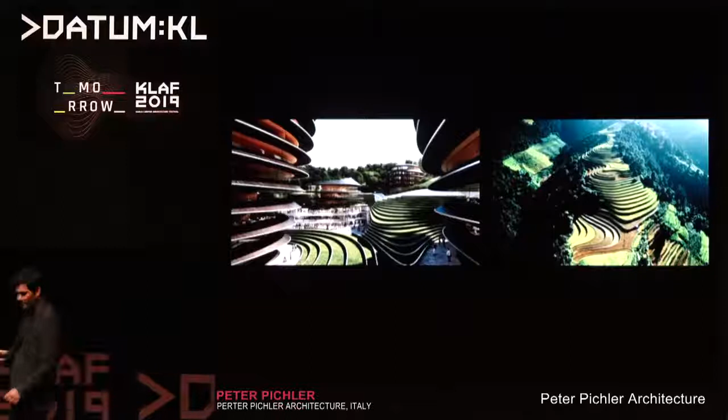But I think it's about developing a holistic approach and not just using wood because it's wood. At the beginning, I was asked about what we are doing in the studio, if it's more a tradition or a revolution. And I think what we are doing is more an evolution. Thank you very much.